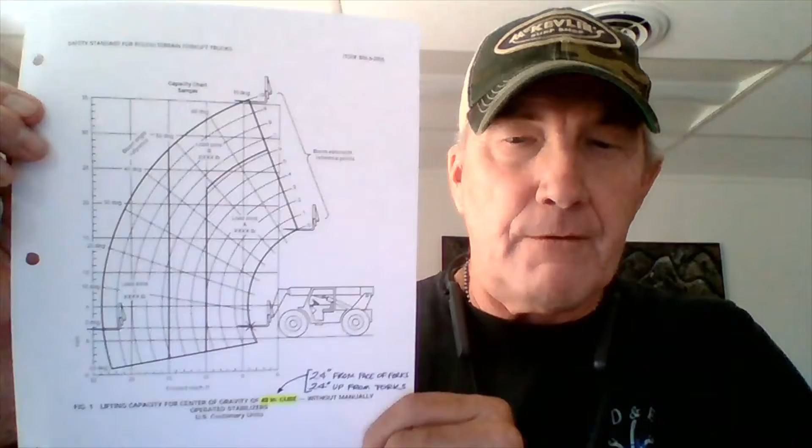So that's the rating or the capacity of the forklift, but it's only the capacity of the forklift in a particular configuration. In order to figure out how much a forklift can lift, we have to figure it on the basis of the chart that the manufacturer provides. Now, the manufacturer provides this chart and they tell us that in a particular zone, say zone A or B or C, the forklift can lift this much.

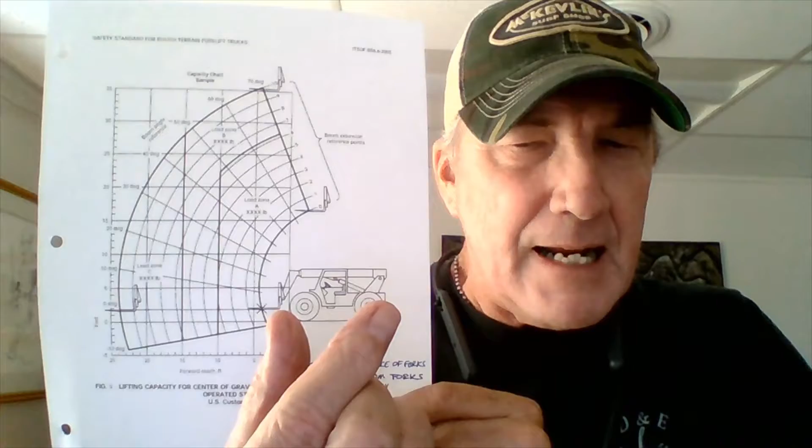So if it's a 12,000 pound forklift, it may be able to lift 12,000 pounds, but that's only if the boom is pulled in as tightly as it can be and within a certain range. So for example, if you have a forklift, it happens to be a 12,000 pound forklift, as this one says that it is, it may be only able to lift 12,000 pounds in this particular configuration. If you lengthen that out, then it changes in the amount of capacity that it is able to lift. So that's the reason why your chart becomes important.

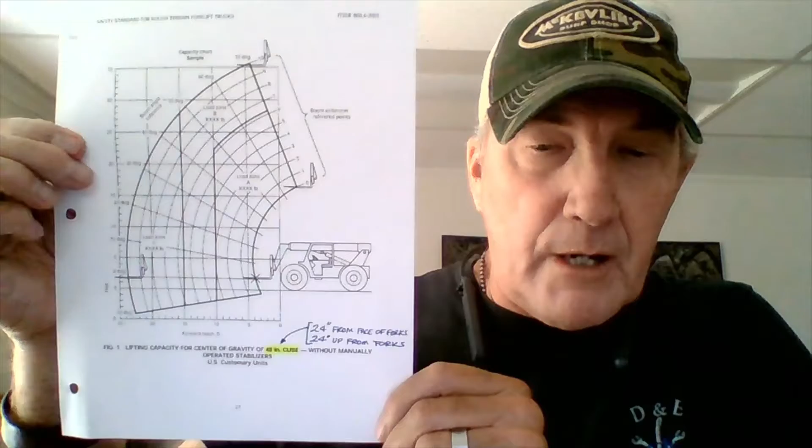Now, when you start to look at your chart, you have to realize that according to the ANSI standard, the center of gravity on your load is based on a 48-inch cube. That is 24 inches from the inside face of the forks and 24 inches up from the inside of the bottom of the forks. Let me make that a little clearer. This is what they're talking about. The inside of the fork out 24 inches, 24 inches up from the top of the fork as it extends horizontally. So that's what we're talking about.

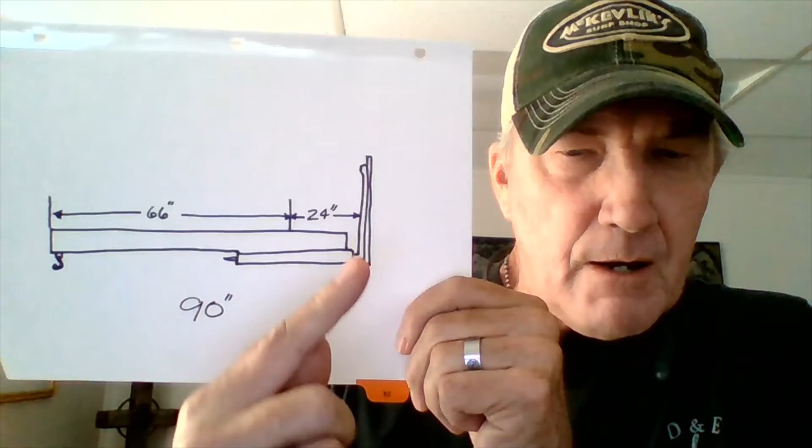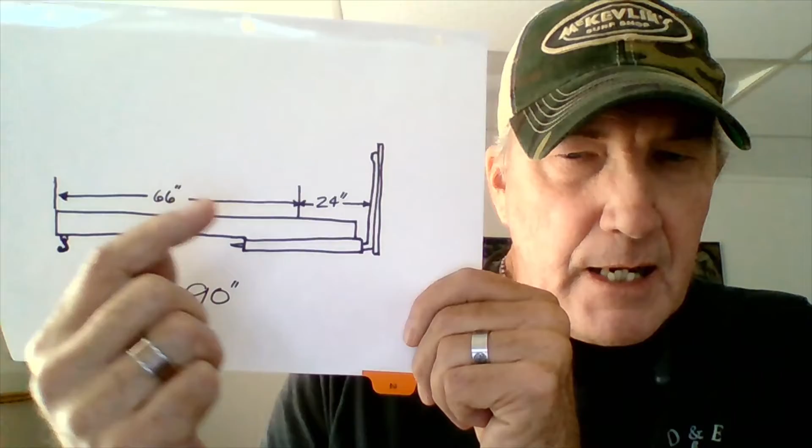Now then, what happens? How do we figure the capacity of the forklift when this 24 inches changes? And it will. We, for example, have a boom that we can put on the forks. That boom slips over the forks there, is latched to the back of the headache rack. And now what used to be 24 inches has changed by 66 more inches. So now from the inside of this face of the fork out to the hook is 90 inches, 66 and 24 added together. So then, how do I figure what my forklift is able to lift based on this new center of gravity?

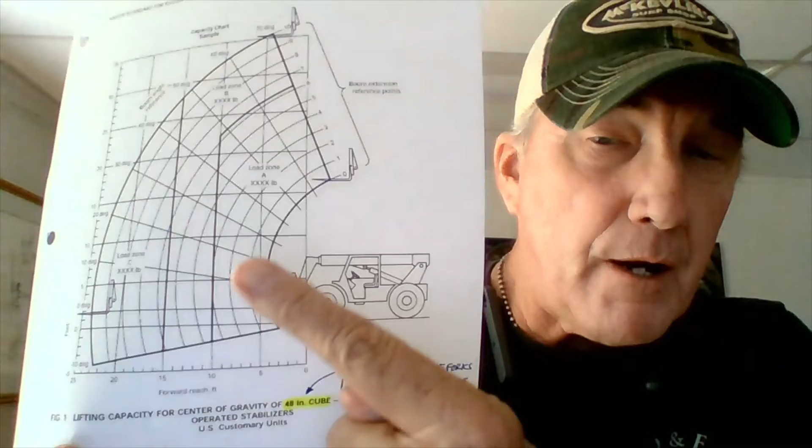Now remember that with the chart that you're using, you have to start with wherever that chart tells you you're going to be as far as the capacity of the forklift, depending on how much you've extended. So if you extend it out 10 feet, 20 feet, it makes a difference. So you can only start from where the forklift tells you you can be when you have extended the boom out. So then, how do I figure this correctly? Well, I started with 24 inches. Now then, I have ended up with a center of gravity that's moved out to 90 inches. So what I do is I divide the 24 by 90. 24 divided by 90 is 0.26.

Now then, if in the range of where I have the forks, say, for example, I started with a 12,000 pound forklift and I push it out 20 feet and maybe I'm down now to 6,000. I have to figure this change of center of gravity based on where it lands, out where that chart tells me. So now I'm at 0.26 times, say, 6,000 pounds. That means that ultimately I end up then with a 1,600 pound capacity.

So if the column that I'm trying to lift is 800 pounds, that's fine. If it's 1,200 pounds, that's fine. If it's 1,600 pounds, then I've reached the maximum capacity of what I can lift with that forklift and the boom extension in this configuration. So if I need more, I have to change the configuration. Maybe I have to pull the boom in to where I'm able to, say, lift 8,000 pounds. I still have to do the same math, but I have to do it according to what the chart tells me, which is where I can start, then ultimately end up multiplying the 0.26 times whatever it is, and then I end up with my final weight.